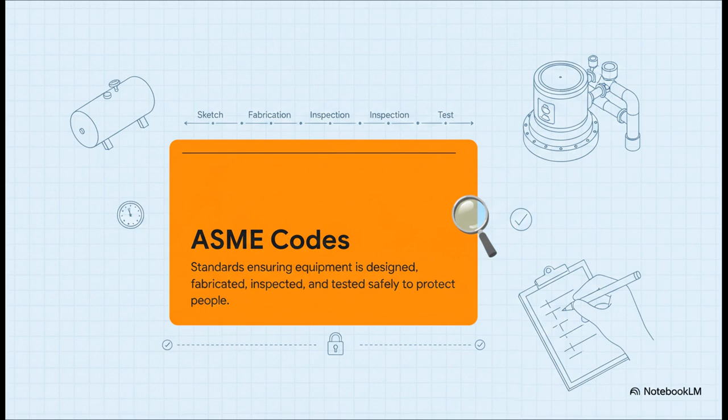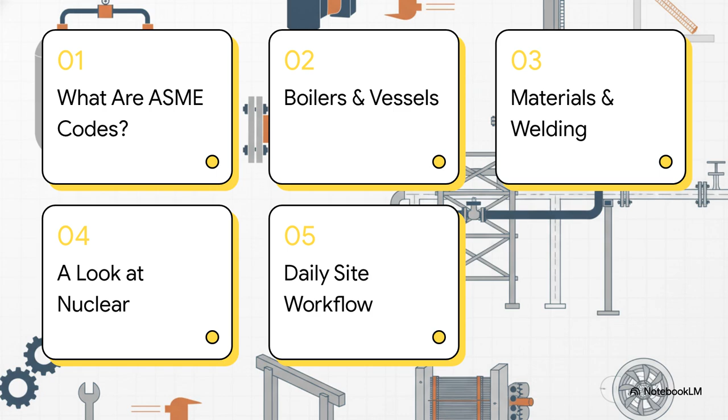So here's our game plan. We're going to start with the fundamentals. Then we'll break down the specific codes for boilers and vessels. After that, we'll cover the core pillars of quality, materials, and welding. And then we'll take a quick look at the super high standards of nuclear. And to wrap it all up, we'll put everything together into a practical site workflow that you can literally use tomorrow. Okay, let's dive into our first section.

Before we get into all the specific formulas and site checks, we really need to get our heads around why these codes are the absolute bedrock of safe and reliable engineering. And that why is absolutely everything. Look, these codes aren't just about tedious paperwork. They literally protect lives and billion-dollar assets.

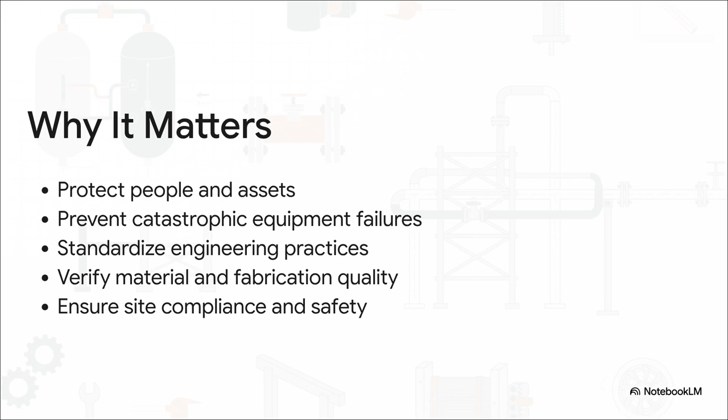They create a universal standard, right? So an engineer in Houston and an engineer in Dubai are working from the exact same safety principles. They give us a clear, repeatable method to verify that the materials are right, the fabrication is solid, and the final installation is safe. It's a huge deal.

All right, let's start getting into the nitty-gritty, starting with the equipment that handles pressure. This is where the risk is highest and, honestly, where the rules are most critical. We're talking boilers and pressure vessels. First up, we've got ASME Section I. This is for power boilers, the real high-pressure workhorses you see in power plants.

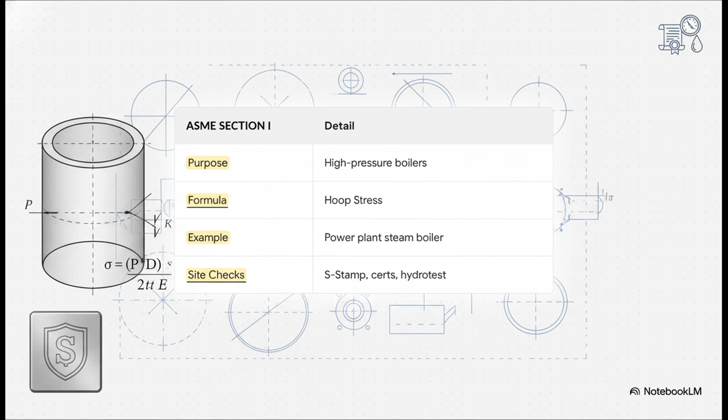The key thing to understand here is the hoop stress formula. So why this one? Well, because it directly calculates the force that's trying to rip the boiler's shell apart from the inside out. It is the fundamental check that proves the wall thickness can handle that immense pressure. Now, when you're on site, your first check is that S stamp. It's your absolute non-negotiable proof of certification. From there, you're tracing material certs, witnessing the hydrotest, and verifying every single welder's qualifications.

Now, let's switch gears to a totally different kind of boiler. Section IV covers the low-pressure heating boilers, the kind you'd find in a big commercial building. The whole risk profile here is completely different. Instead of containing massive, explosive potential, the focus shifts to making sure it operates safely and efficiently.

And that's exactly why the key formula here is boiler efficiency. Your site checks reflect this, right? You're testing safety valves, checking burner alignment, and confirming integrity with a hydrotest. It's all about safe performance, not just brute strength.

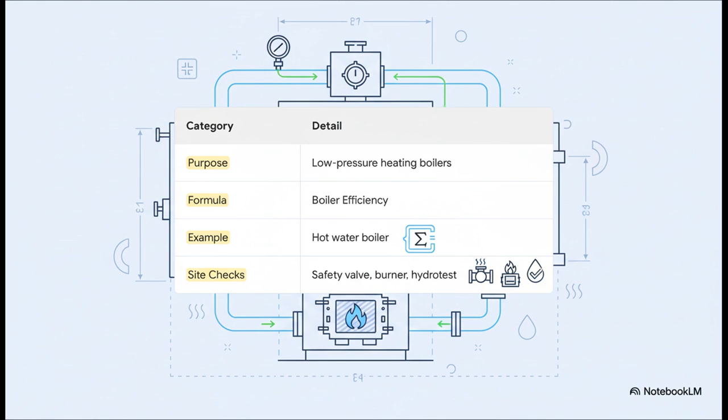And now for Section VIII, which covers unfired pressure vessels. So think of things like air receiver tanks. Here, the one number that matters most is the MAWP, the maximum allowable working pressure. This number is everything. It dictates the vessel's absolute safe operating limit, period.

When you get to the site, your first stop is the nameplate to verify this MAWP. Then you're going to dig into the design records for joint efficiency values, review the radiography films to hunt for any hidden weld defects, and then you witness the final proof, the hydrotest.

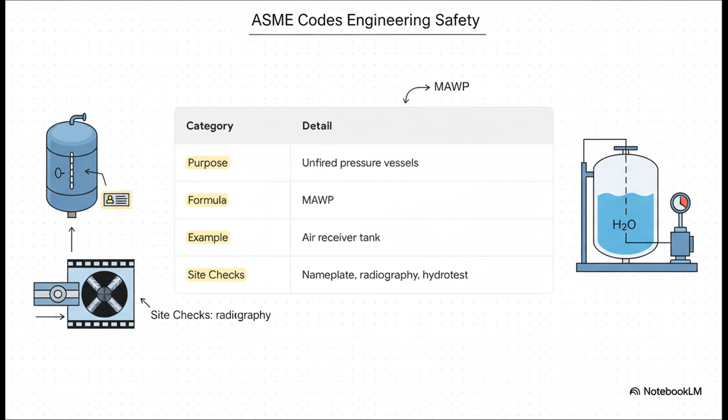So, we've got the rules for the equipment itself. But how do we actually guarantee it's built correctly? Well, that comes down to 3 essential pillars that form the core of quality fabrication: using the right materials, having qualified welding, and doing rigorous inspection. It all starts with the material, and that's governed by ASME Section II. This code is basically a massive library of material specifications.

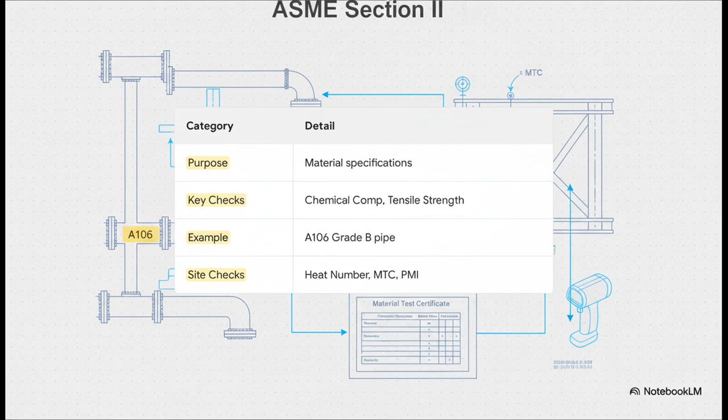For any material you can think of, it defines its DNA, the required chemical composition, and its mechanical properties. On site, your job is all about traceability. You have to match the heat number on a piece of pipe to its material test certificate, the MTC, which is essentially the material's birth certificate. And for the final on-the-spot proof, a positive material identification, or PMI test, which confirms the material's chemical fingerprint right there.

Next up, welding, which is covered by Section IX. Now, what's really interesting about this code is that it doesn't actually teach you how to weld. Instead, it tells you how to prove your welding is repeatable and sound. The WPS, or Welding Procedure Specification, is like the recipe for the weld. It details every single variable. The supporting PQR, the Procedure Qualification Record, is the proof that you successfully cooked that recipe once in a controlled test.

So your job on site is simple but absolutely critical: check the welder's ID, make sure that exact recipe is available and being followed, and then, of course, inspect the final work.

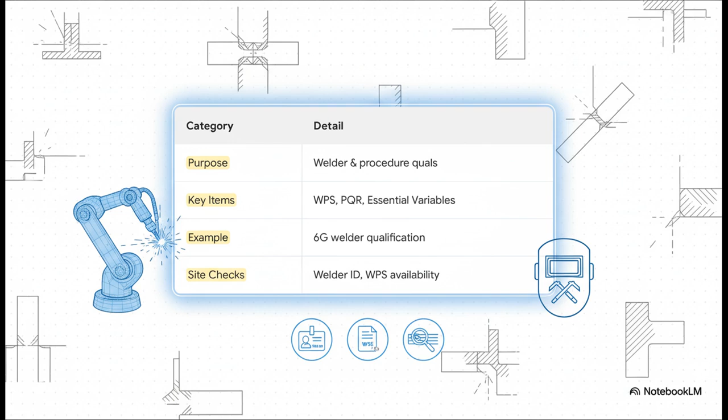So how do we inspect a weld without cutting it open? That's where Section V, non-destructive examination, comes in. It's the rulebook for methods like radiography and ultrasonic testing, or UT. And this is just brilliant engineering. With UT, we're sending sound waves through solid steel and analyzing the echoes that bounce back. It's like having X-ray vision for metal, letting us hunt for hidden cracks or flaws that could cause a failure years down the road.

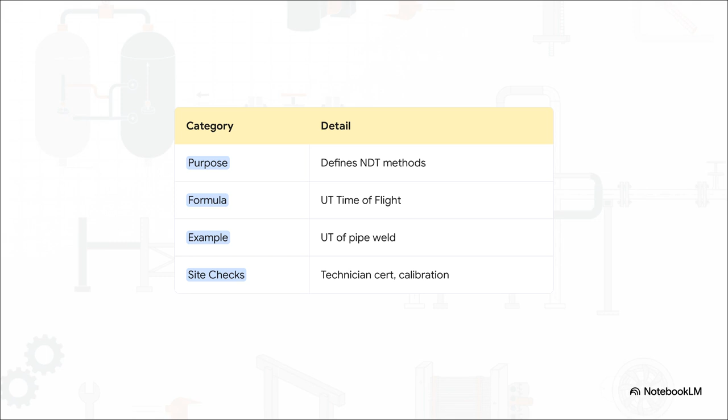As the QA/QC engineer, you are the gatekeeper. You verify the technician's certification, you check their equipment calibration, and you meticulously review their final report. So far, we've been covering standard industrial applications. But now, we're about to level up.

When it comes to safety and quality, nothing, and I mean nothing, is more demanding than the nuclear industry. And that, of course, requires its own, even more stringent set of rules. Welcome to Section III, Nuclear Components. In this world, every single detail matters. The designs are based on a much, much higher safety factor because, well, the consequences of failure are just unimaginable.

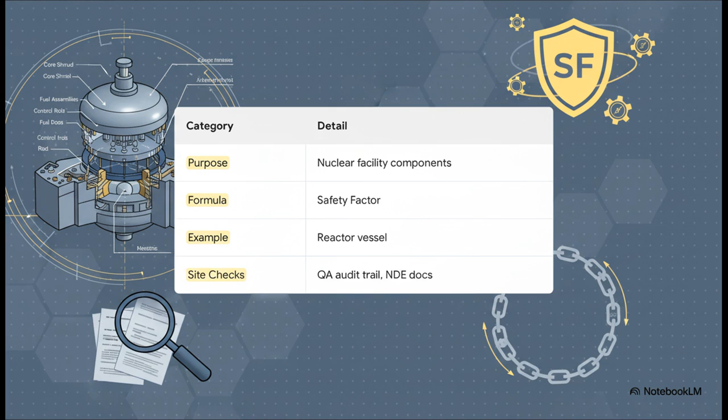For something like a reactor vessel, the verification process is exhaustive. The single most critical element is the QA audit trail. You have to have a perfect, unbroken chain of documentation for every material, every weld, every inspection, all the way from the steel mill to the final installation. There is absolutely zero room for error.

Wow, we've covered a lot of ground. So now let's pull all this information together into a practical, step-by-step workflow you can actually use on your projects. This is how you apply all those ASME codes in the real world. Okay, here's how it all comes together on site. It begins the second that material arrives.

Step 1, you grab that shipment of pipe and immediately check its MTC. That's your direct link straight back to ASME Section II. Next, before a single welding arc is struck, Step 2, you verify the welder's qualifications and make sure the correct WPS is right there, satisfying Section IX. Then, as fabrication gets going, Step 3, you're witnessing the welding and checking dimensions, following the rules of Section VIII.

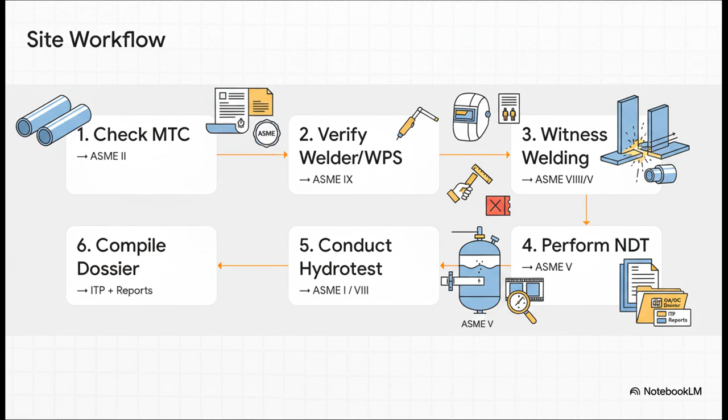After the welding is done comes inspection. Step 4, you oversee the NDT crew and review their work based on the procedures in Section V. Step 5 is the final proof, conducting the hydrotest according to Section I or VIII. And finally, Step 6, you compile all of this evidence, every report, every cert, into the final QA/QC dossier.

And this brings us to the final output. And look, this isn't just a big pile of paperwork. It's the proof. It's the complete story of that equipment's life and its quality. By meticulously following this workflow and connecting every single physical action back to a specific code requirement, you produce what we all want, a safe, fully documented, code-compliant piece of equipment that is ready for a long and reliable service life.

So there you have it, a blueprint for navigating the entire world of ASME. We've gone from the very fundamentals to the most stringent nuclear standards and wrapped it all up with a practical workflow. The only question left is, which one of these powerful tools are you going to put into practice on your project tomorrow?